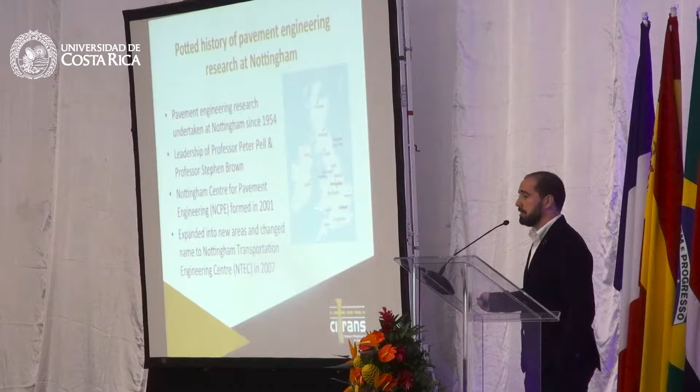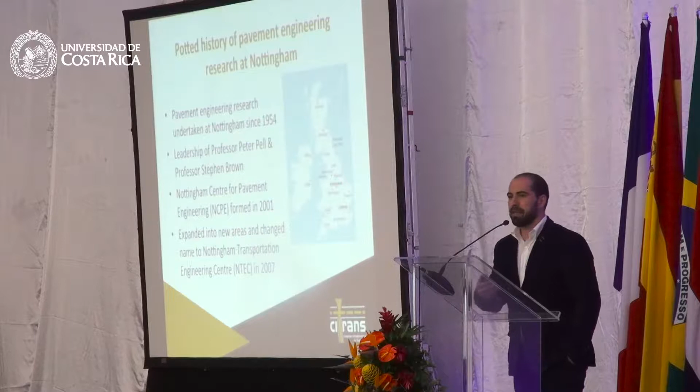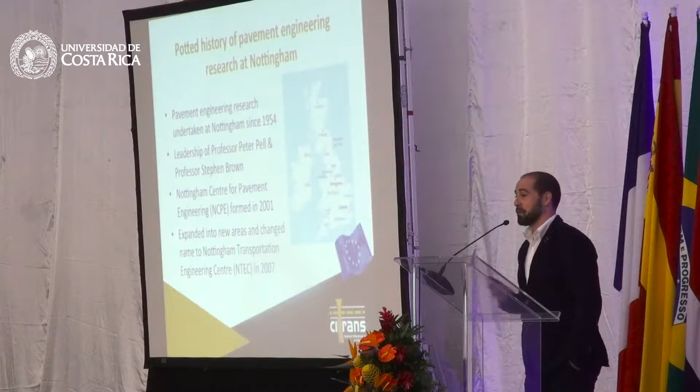Now, for those who don't know, Nottingham is in UK, right? It's in that little red spot in there that is 2 hours by train from London, and it's in an island that belongs to the European continent. Although recently we are having some issue of communication with Europe, and I would just say that the European continent is kind of there, right? But you are more than welcome to come anytime, in both Europe and UK.

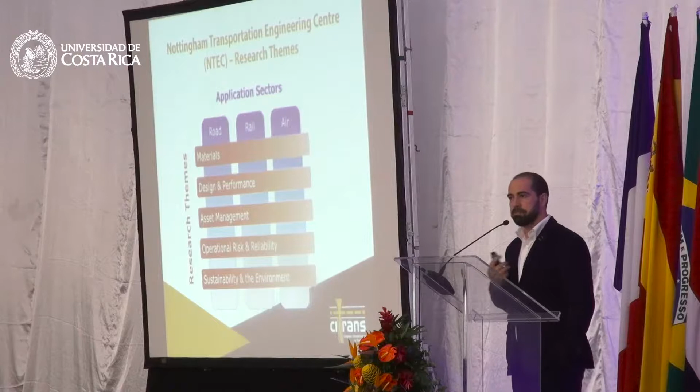To continue, the center, the building that you can see, was built by Shell basically. And it was built with the same vision and effort of the people that are now in Costa Rica. And the group now is a little bit smaller, because we kind of had a reassessment, but still a very good group, quite big and influential in the pavement engineering community. We work in several sectors, I have to say mainly in road and railways, by looking at different types of material, different types of design. And between these research themes, I would say sustainability is the one that really belongs to me. In order to tell you what my contribution is in this, I will not say a lot of words, but I will invite

We all want efficient roads and railways that don't ruin our environment. But what does this sustainability look like, and how do we assess it? The SUP&R ITN was set up in 2013 with European Commission support to create a new generation of professionals to help answer these questions now and in the future. We formed a multidisciplinary and international consortium led by the University of Nottingham to give this team training through research in centers across Europe. 4 years down the line, and our team has tackled a range of problems.

In pavement, they've investigated energy reduction through low-temperature asphalts by defining a design procedure for airport pavements, developing an environmentally friendly bitumen emulsion, and seeing if combining it with a high rate of recycling would affect durability. Meanwhile, 2 other studies investigated the successful reusing of end-of-life tires and biomass within pavement. In railways, they investigated combining low-temperature asphalt with recycled materials to create sustainable trackbed sublayers, reducing maintenance needs through ballast stabilization with bitumen, and improving track monitoring by using vehicle responses to detect track damage or through geophysical methods.

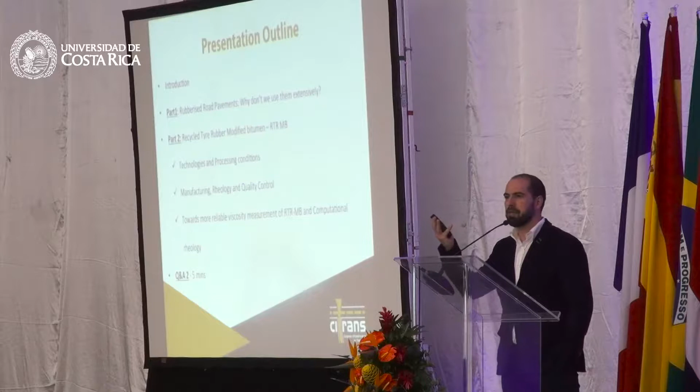Right, having said that, my presentation is going to be mainly made of 2 points. The first one, I would like to be a little bit provocative and ask why we don't extensively use rubberized asphalt. Bill before told you the benefits of it. I would like to go a little bit more into the basics of this technology and possibly stimulate the thinking and some replies from you. And also I would like to provide you a little bit of the experience that I gained in these years with this type of material, and possibly some advice for researchers, people that are supposed to provide technical support to contractors, policymakers, and whoever has to implement this technology.

So, first of all, end-of-life tires are a waste of a resource. I can just say very quickly that this material is increasing with time. There is a massive use of tires and a massive amount of waste tires. In Europe, we have been able now to recover more than 96% of this material, and we need to find solutions for further use. So what we do is basically take this material, an engineered material that engineers like us created, and we try to make it into crumbs or different forms, and we have to find solutions for reusing it.

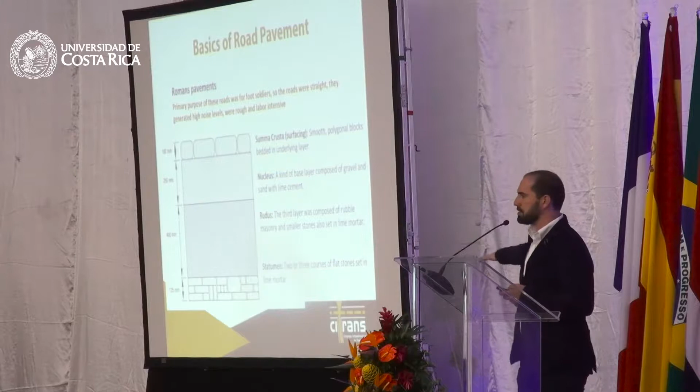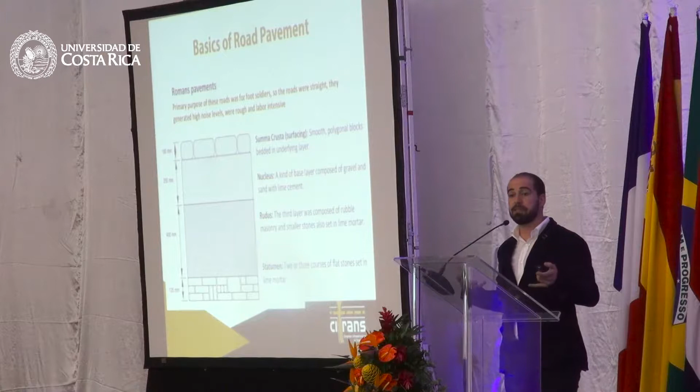Well, apparently, rubberized asphalt is one of the most successful in terms of reuse of material. But how come? Why is that? Well, to tell you, don't be scared, we are going to Roman times, but I'll be quick. This is just to say that the pavement is a structure that is quite simple. We have to bear some load. We would like the structure to be away from water. And so we create a flat surface with stones. We create some space to avoid the water coming up, and we still have the structure for some bearing capacity. And then we have a functional layer that at that time was for soldiers. It doesn't have to be too comfortable, but it has to be stiff to spread the load.

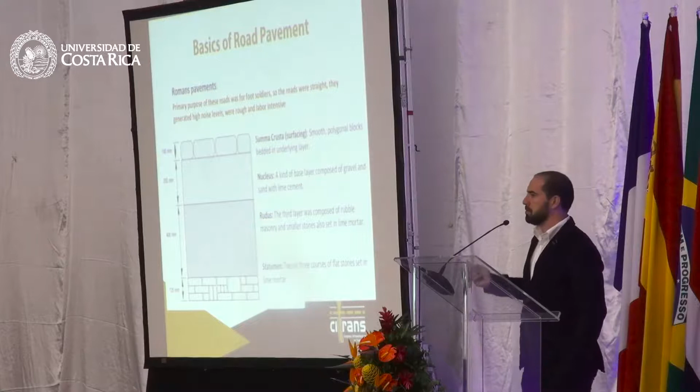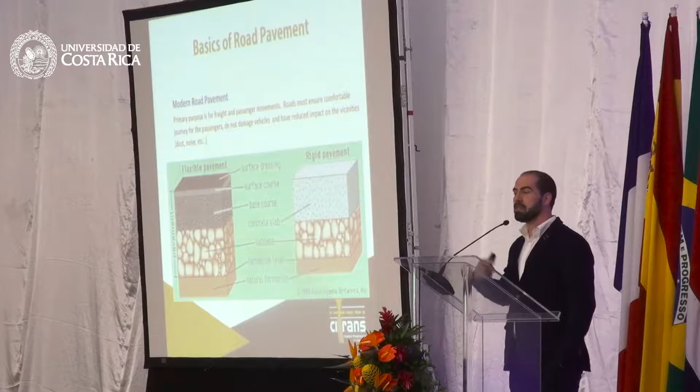Modern times, did we change a lot? Well, the structure is the same, but we have been changing the type of load on it, because now we want a comfortable ride, we don't want dust, so we started using rigid but also flexible pavements. So how do we get that? Well, for flexible pavement, we would like not to spread the load as much as we can, so having a structure that flexes. In order to do that, we play with the material by mixing aggregates, binder, other stuff, and achieving a good formula that allows us to have a material that withstands permanent deformation, fatigue, low temperature, you name it. Now, I can tell you that if you want something more flexible, maybe rubber can help. And this is pretty much it.

What we did is engineer this asphalt with a material that can help have better performance, a better flexible pavement. And how do we do that? Well, the rubber, when it's reduced in pieces, is called crumb rubber, and it can be used as a modifier of the bitumen or as a replacement of the aggregate. In this talk, I'm gonna focus on what we call the wet process. That is the modification of the binder.

That, by the way, is the most successful technology that you find. It is the technology that really can help the widespread use of the rubber when we talk about performance. So this technology is basically a binder that is non-homogeneous, and that's the main problem. Because being non-homogeneous, it's, we say, not storage stable.

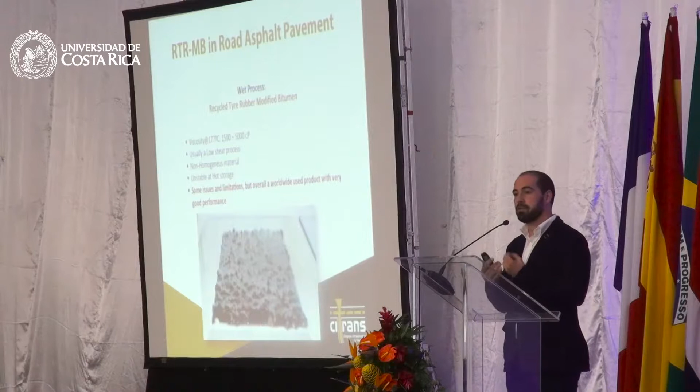When you are in a plant and you want to keep your binder in a tank, it happens that the plant keeps the tank on for the weekend. So you want this binder to be homogeneous for at least 3 days at a high temperature. That's the test that we do to actually assess the storage stability. Well, this material is not storage stable, and that's a very important point that is actually creating problems for the widespread use of this material. But apart from that, it actually allows us to have a very, very good product, very good technology for road pavement.

First of all, this is not related to the asphalt or the flexible pavement, but I really want to name it because I really think that everyone should use it. So the SAMI. SAMI is basically a tack coat that you can put when you do an overlay: you spray the bitumen, you put the rubber, actually a lot of rubber. We have 1,500 tires per kilometer. And then you put the pavement on top. This creates, with the chippings as well, a reflecting membrane that basically prevents cracks from coming up or going down, but mainly coming up. This uses a lot of tires and can be immediately used.

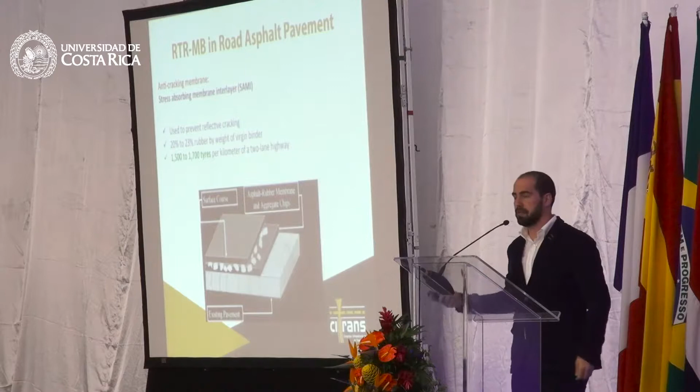The others that are more related to the asphalt are the more famous one, that is the open graded, so it's a kind of porous asphalt that allows you to use a lot of binder, almost 9%. But it can also be used in dense graded and gap graded with a different type of formula.

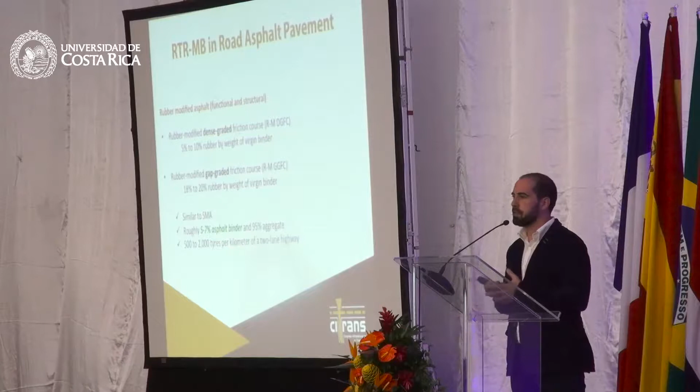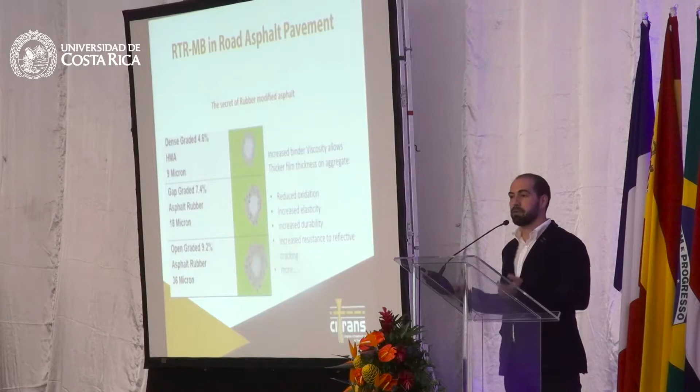But what's the secret? Why can we do this? Why do we have better performance? Well, the main secret is that because the rubber allows the binder to have a higher viscosity, it actually allows a thicker film around the aggregate. And this also allows a higher amount of binder. So you have an asphalt that may cost more, but actually it has great performance. We come back to the flexibility we were talking about before. Now, this is the main secret.

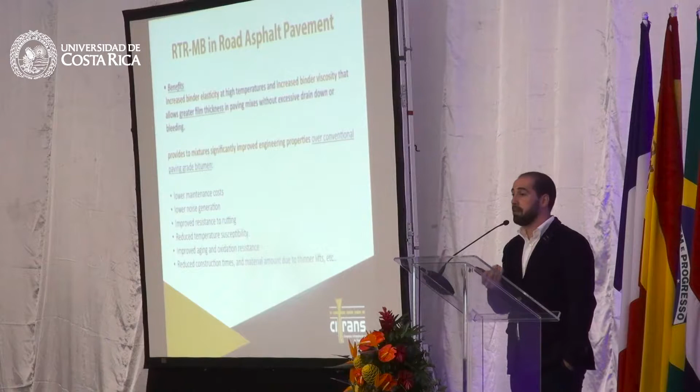There are others. I can just list them. The benefits are all listed in there, and the literature is full, but mainly this is the secret: having the thicker binder and also reducing what we're discussing today, the oxidation of the binder itself.

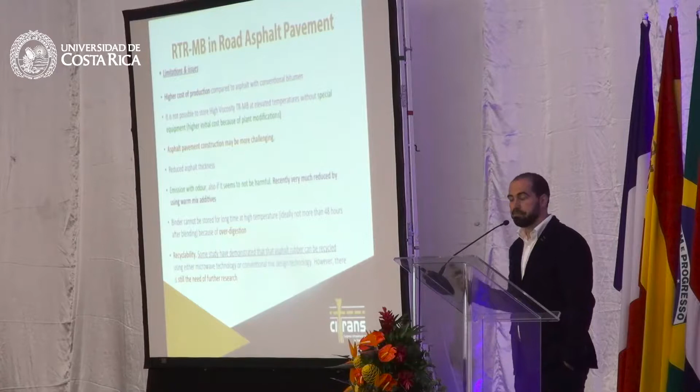The limitations, these are the main things that possibly as pavement engineers we can improve. Well, there is a higher cost, mainly because you have more binder in it. The storage stability is a main issue, and that's why you have to modify the plant to have tanks that are agitated. Then also the construction is more challenging, and you need training for these people. Recyclability is still not fully proven, but there are a lot of studies that start to say that we can recycle this material too. So if we manage to overcome these issues, we have a product with very good performance.

And now I'm trying to show you a few technical bits that you can take and possibly spread or use in your work. But before, I wanted to say that this technology really can be compared to asphalt with polymer modified bitumen, if it's not better in certain ways, like with porous asphalt. And again, I want to pose you the question, why don't we use it? And possibly we can have some replies later on.

Well, what we can do is support contractors or people that want to use it with better quality control and a better design of this material. I personally did it for pavement, but also for railways, and recently also for roofing membranes. And this technology is actually starting to be used because of sustainability, which is starting to be a very good reason, but also because tire rubber can be a replacement for synthetic polymer if there is some good engineering behind it.

Right, let's go more to the technical part. First of all, we have one product, the one that is not storage stable, the one I just showed you, that is called the high viscosity tire rubber modified bitumen.

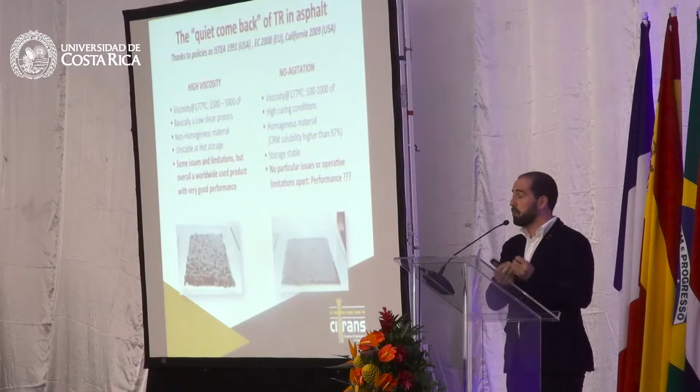But some researchers, like me, are trying to overcome the problem of storage stability by creating a binder that we call no agitation tire rubber modified bitumen, that basically is storage stable, and the interaction between the bitumen and the tire rubber is different. Now, this binder still doesn't have the performance of a polymer modified bitumen, but that's where the research challenge is.

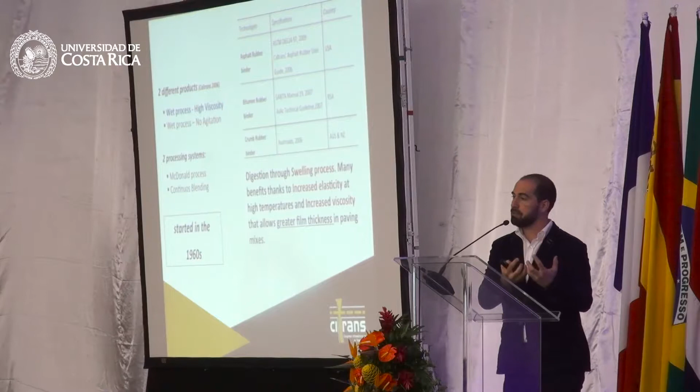In order to produce this, well, the high viscosity is the one that is most famous, and actually there are specifications on it. And the phenomenon is basically a swelling of the tire rubber within the bitumen. So the oily fraction is swollen within the tire rubber. And this increases the viscosity and allows a greater film thickness.

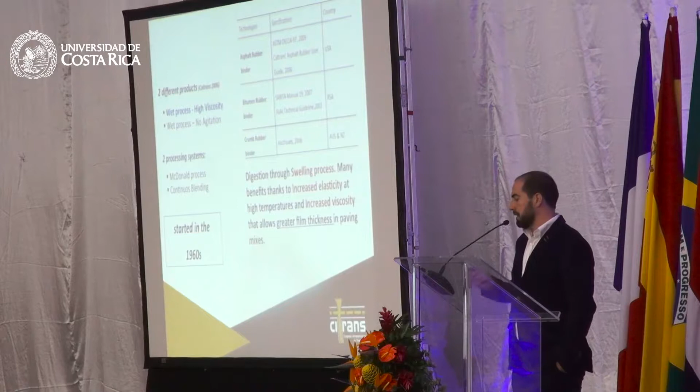This can be produced in two ways. The first one is the historical one, where you have initial mixing, also in low shear, but then there is a digestion process that allows this swelling to take place. And this is called the McDonald process, from the name of the inventor, actually from Arizona.

The other one, that maybe can be used also in different countries, I think, is the continuous blending. So you can use a high shear blender, the same that you can use for PMB, and you can then use storage tanks, but agitated because of the storage stability. Or if you do it in the field, or you do it in batches that don't need to be stored, you can use it directly with the mixes.

The other one is the no agitation. As I was saying, it is a completely different process. You tend to melt the tires within the bitumen, so you have a matrix that is actually kind of fluid. You don't have this inhomogeneity. But with this, of course, you start losing the properties of the rubber. So you need to find a balance between the storage stability and the performance of the binder.

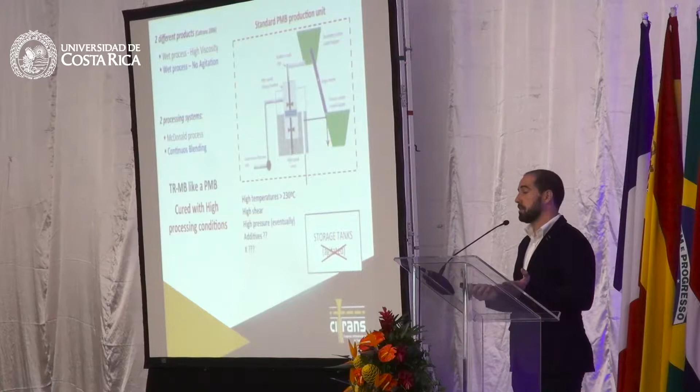This type of technology can be produced with what we call high processing conditions, so high shear, high temperature, and it doesn't need, as I say, agitated tanks. I don't want to go through this, there is literature on this, but each of these variables has its own importance in the process. Keep in mind that the temperature is the main parameter. After 160 degrees, the rubber starts to, let's say, break, depolymerize, devulcanize, and can interact better with the binder.

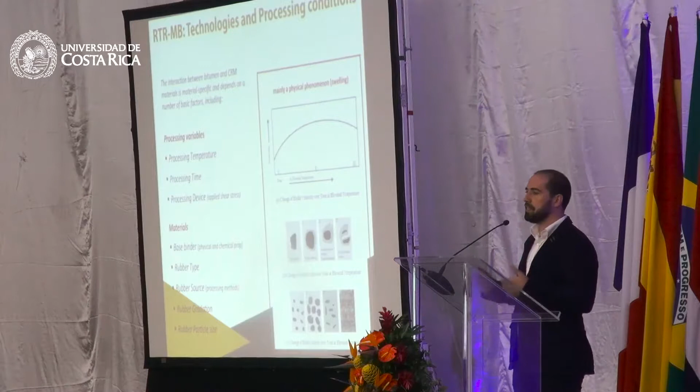Then the time is also a main parameter. But as engineers, we can cook it properly, right, and optimize this process. And actually, also these specifications I was telling you about before tell you which type of processing conditions to use to obtain the type of product they want.

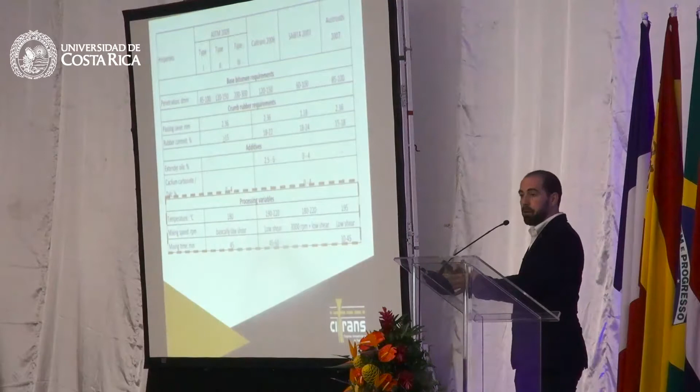The main information that I want to give you, though, is that in order to support a contractor or whoever wants to produce this, we need to have a very strict quality control of this material. We need to design it properly, we need to go in the field, get some binder, and again do testing. And only with this loop can we ensure that we have a superior binder design.

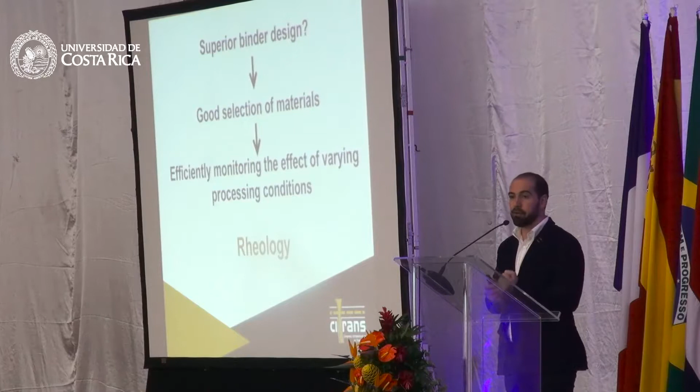But in order to do that, we need a good selection of material, but actually also some methodology that allows us to monitor this process. And I did find in my research that rheology is something that is very powerful and can help designers and pavement engineers in this task.

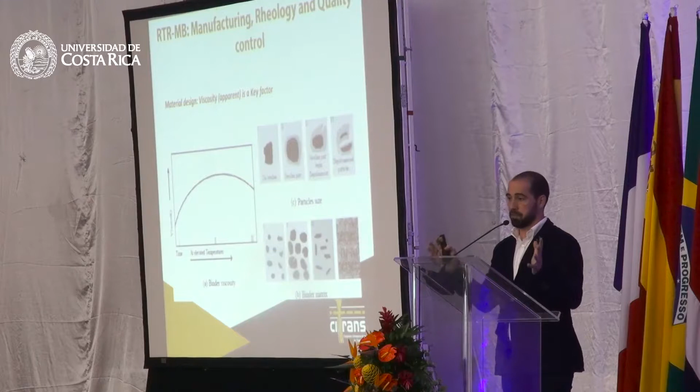Now, what I want to show you is that there are some issues when you do rheological tests with this material, and we still need to improve the way we do tests to get the results that we need to support people. First of all, I want to point out that this process is very much linked to measuring viscosity, right? Because the peak of this curve is the one that we want to achieve to have the best binder possible. So how do we do that?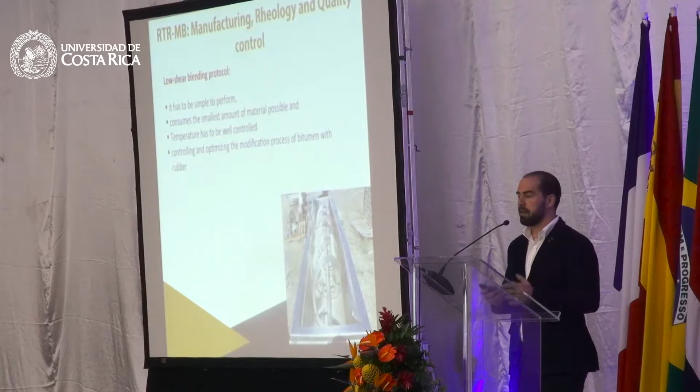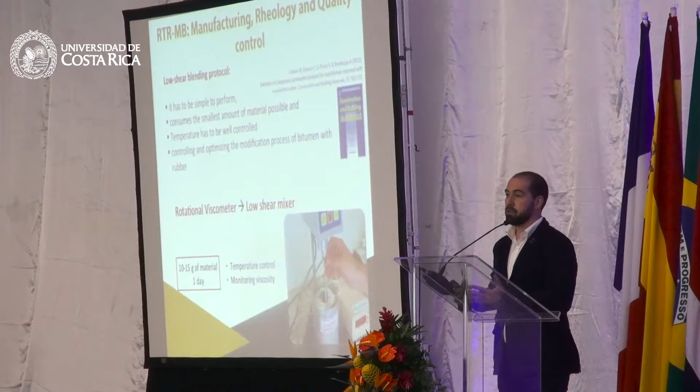You can do it quickly, and that's why we developed a procedure that basically adapts the Brookfield viscometer to be used as a mixer. So you can control the temperature, you can measure the viscosity in real time, and you can have this type of curve that tells you when you reach the viscosity, when you reach it with different contents of tire rubber.

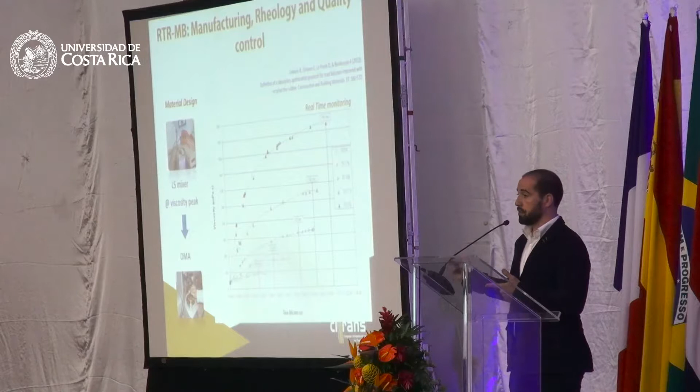If you couple this with the use of a rheometer, first of all, I want to underline that when you use a rheometer with this material, we have to be careful. My suggestion is to monitor high temperature rheology, because if you monitor that and optimize that one, it will be fine at low temperature. I'm not proving this to you here with evidence, look at the literature, but that's the best

way we found. One thing that I want to point out: if you use an inhomogeneous material with particles that can be more than 2 millimeters sometimes if you use the McDonald process, you really need to be sure that the gap of your plate geometry is able to give you the data that you need. In this study, we basically do the gap setting study, and when we monitor an SBS, that is kind of a homogeneous material, even if you change the gap, you still have phase angle, at different temperatures, that doesn't change with the different gaps.

But when you go to a tire rubber modified bitumen, especially at high temperature, when the binder is melted and the polymer is still there, you can have misleading results. In particular, with 1 millimeter, we were basically testing the rubber. So the suggestion is always to do this type of gap setting study. And if the plate doesn't work, you can go to what we call cup and bob, so coaxial geometry. I'm sure you have it in your amazing lab, so just be careful.

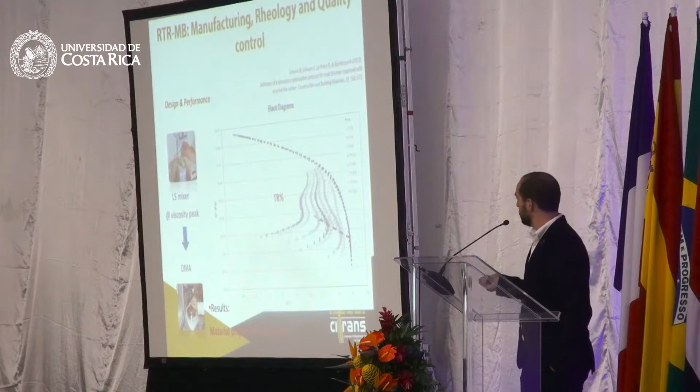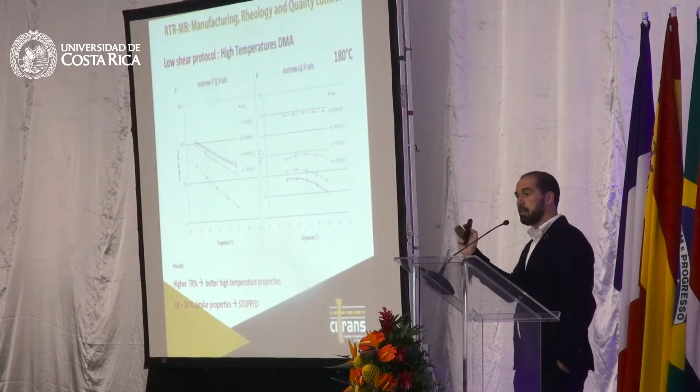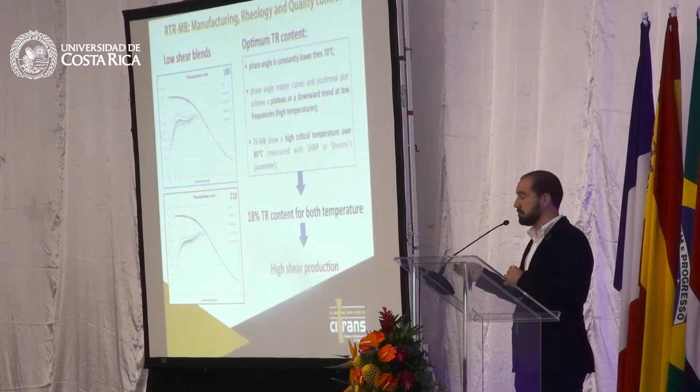What you can do is use the low shear blending protocol with different tire rubber contents, and then you can stop when you start having similar properties. So you can use this data. I also use isochronal plots at high temperature, and by using a really small amount of material and looking at master curves of phase angle, complex modulus, and isochronal plots, you can determine the best tire rubber content for that bitumen.

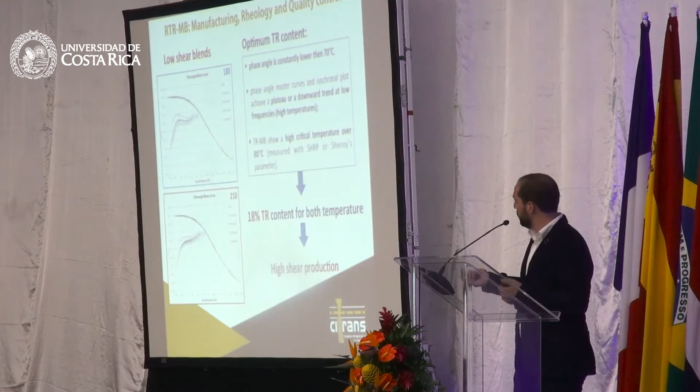Once you have your recipe, you can go directly to high shear if you need to produce a bigger amount. Right? You can use low shear or high shear. Why high shear? High shear just decreases the time. Now we go to that.

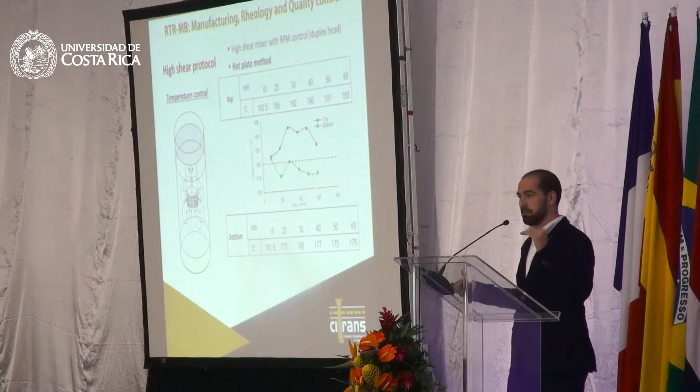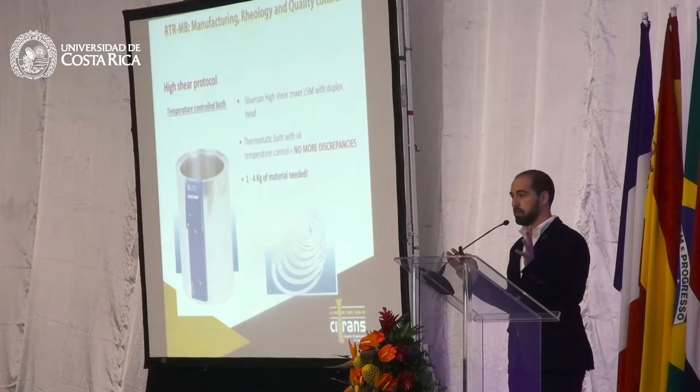First of all, I saw today that you're not using this, but some people use the hot plate method to warm up the binder. If you use this method, you will have a lot of discrepancy in temperature between top and bottom. So my suggestion is really to use a container where the temperature is controlled all over the container, because there is oil between two walls. This ensures the best control of the temperature.

And again, if you use high shear or low shear, the product is very similar. Here is an example of the rheology. But what is changing is the time. With high shear, because you increase the dispersion of the particles, you have a higher reaction, so you can get it in a shorter time frame.

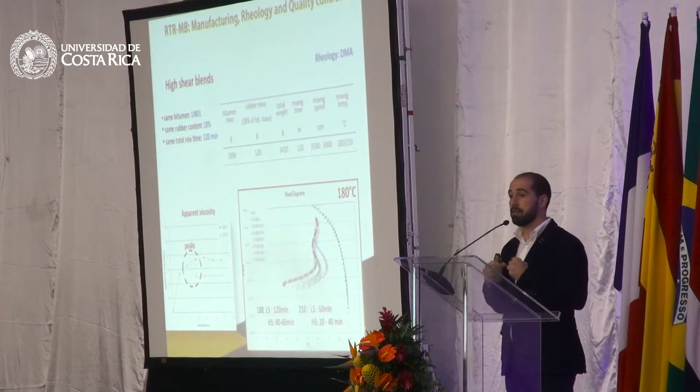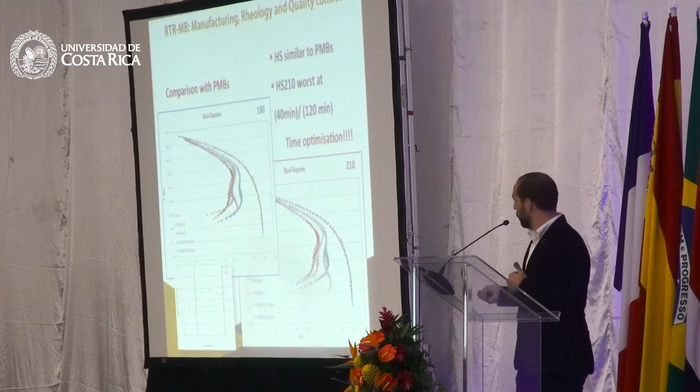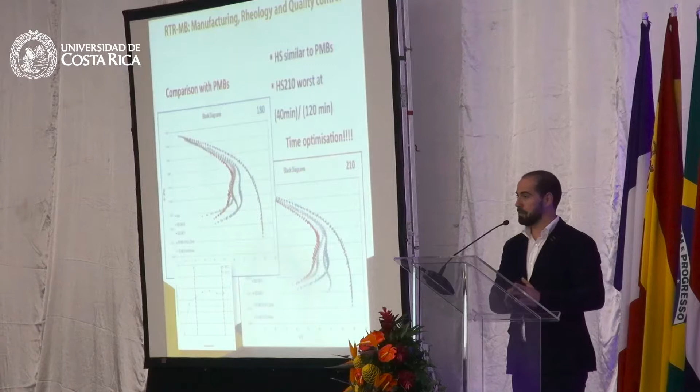But you have to be careful with the time, because in these slides, for instance, the red one is a polymer modified bitumen that has 8% polymer, and the blue one has 4%. So different properties, right? If you use high processing conditions, 210 degrees in this case, and you go with a time beyond what you find in your low shear blending protocol, you may obtain a different type of performance. So you can pass from a highly modified binder to a low modified binder. So time, temperature, and shear are very important in your binder design.

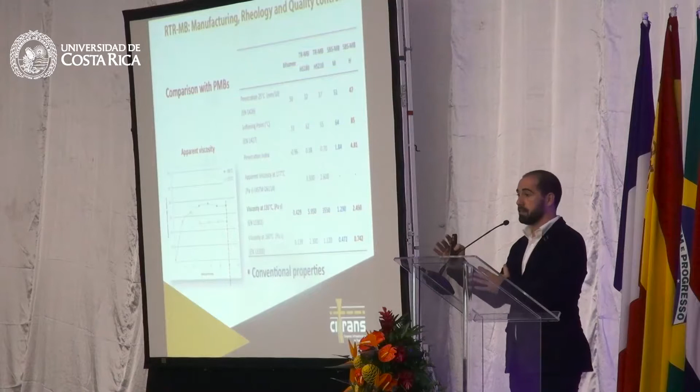I put this slide to say that we can obtain different products. So we can kind of swap from high viscosity to no agitation by controlling this processing condition. And my suggestion is always to compare to a target that, for the reason you understand, for me, is a polymer modified bitumen. So you want to obtain a superior product with rubber. So look at the polymer modified bitumen rather than the neat bitumen.

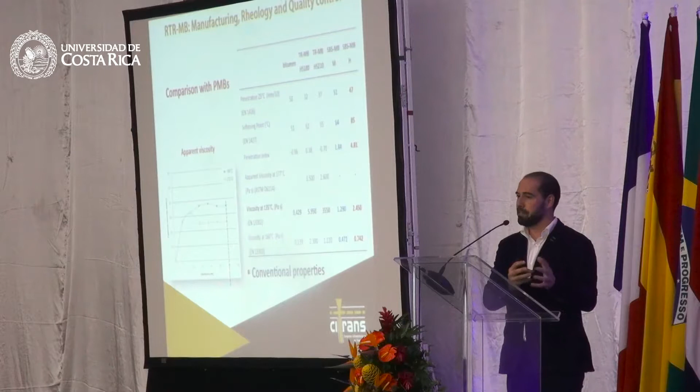As a conclusion of this part, I would say that, again, be careful in the procedure you use in the lab for your binder design. And we can obtain a product that has very similar properties to polymer modified bitumen. And this protocol that I show you really increases and optimizes time in the lab. So I would suggest you to look around, look in literature. I can support you too, but I found a lot of benefits.

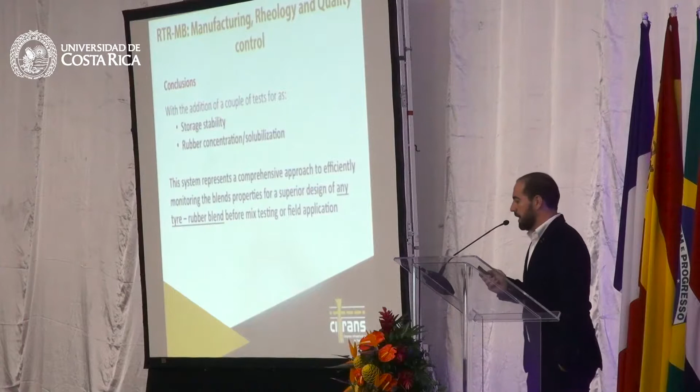Now, as a conclusion, if you use this type of protocol and also possibly try to understand the concentration of rubber and storage stability, you can really go towards no agitation tyre rubber modified bitumen. That for me is the real key to widespread the use of this material in pavement engineering.

Now, as a last part, as I was saying, this product is a little bit not stable, right? But not just in the storage, that is a prolonged storage over time at high temperature. But actually, it's not stable also when we do viscosity measurement. So, in order to show you this, I would like to go, again, simply in the basics. What is viscosity? Viscosity, we can define it as a resistance to flow of the fluid, right? And we measure viscosity of several products, and the bitumen in particular is a very fascinating material because you change the temperature and also change completely the viscosity.

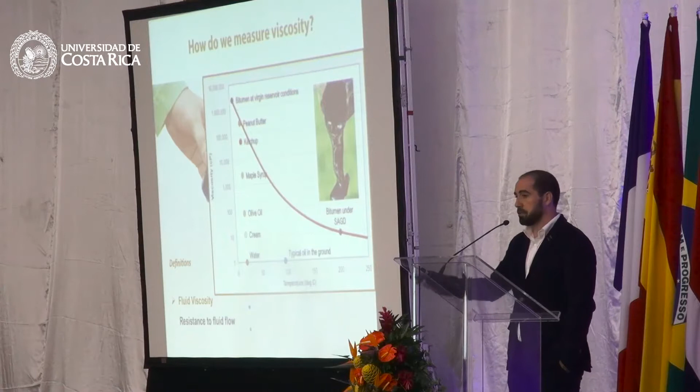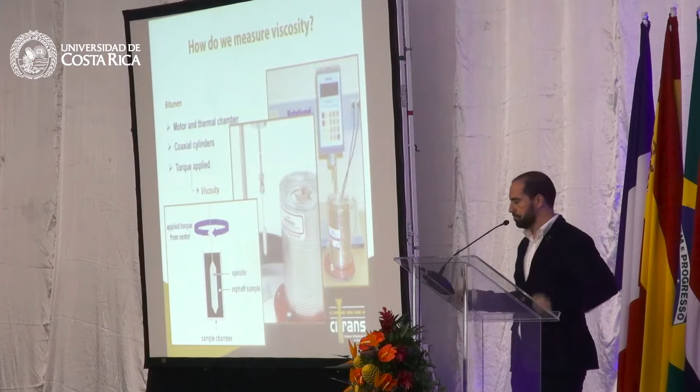So we use usually a rotational viscometer that has a thermal chamber so we can control the temperature. We use coaxial cylinders that allow you to have a cylinder within another cylinder, and you have a film of binder where you measure the torque that is applied by the machine, and through an algorithm you find the viscosity. I keep it simple as this. What I can tell you is that usually this viscosity is calculated with a formula that is dependent on the geometry you use.

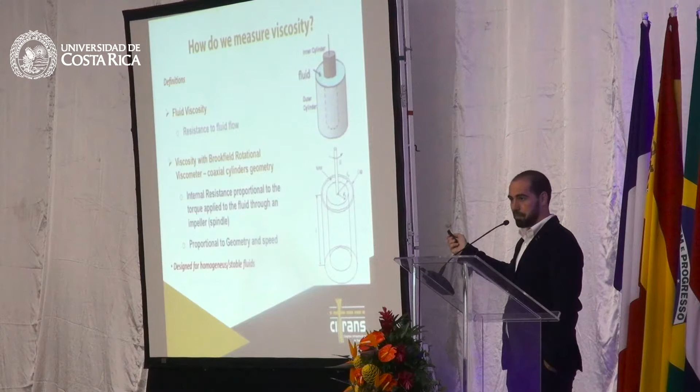So when we use a material that is not homogeneous but is quite complex, like tyre rubber modified bitumen or mastics or emulsions, we can name it, keep in mind that this equipment has been designed for homogeneous material. So what happens when we have complex fluids? Well, I made some research on it, and I just would like to talk you through it.

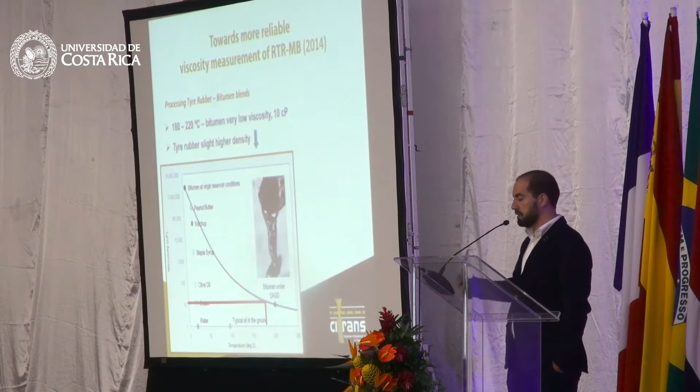When we modify the bitumen with the rubber, we arrive to 180 degrees, and the bitumen has this type of viscosity. Now, we took a standard fluid that is transparent, so we can see what's happening, and has a similar viscosity to the bitumen at 180 degrees. We got some rubber, and we made a glass container. This glass container has a spindle, that is that cylinder that we saw before, right? It's called spindle, this geometry. And this one is a fluid with, I think it's 3%, don't remember, but there is some rubber in it, and we just keep it agitated.

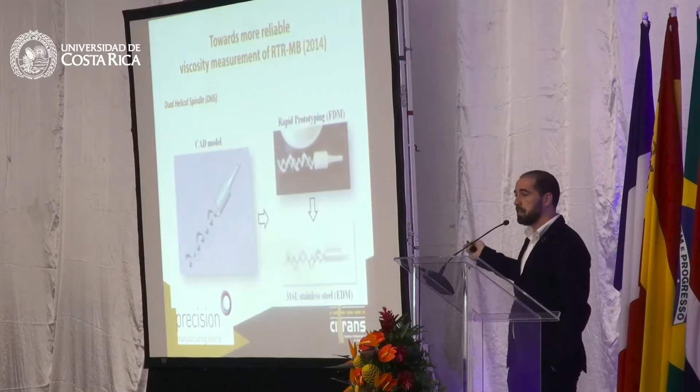Can you see the difference? It's white, so you can see through a little bit. So basically, even after 20 minutes, the particles were still in there. So from this, I continue and say, okay, but then possibly what we can do is changing the way we start measuring the thing. But I just wanted to understand more what was the effect. I mean, why this is happening, and how this can be useful.

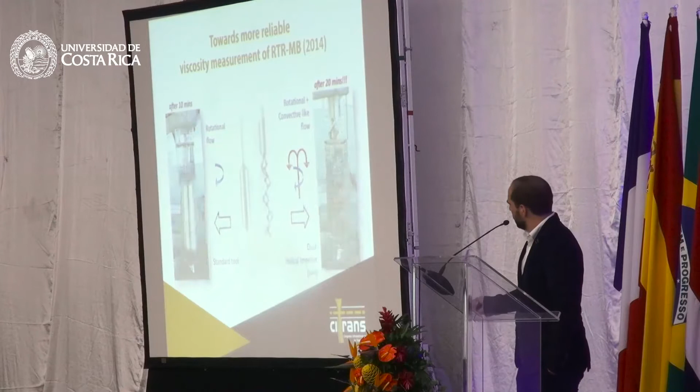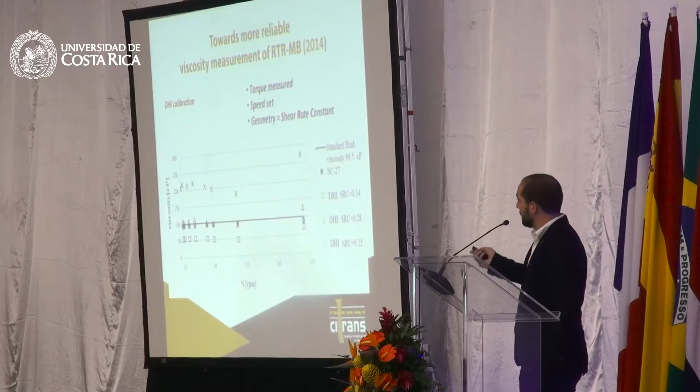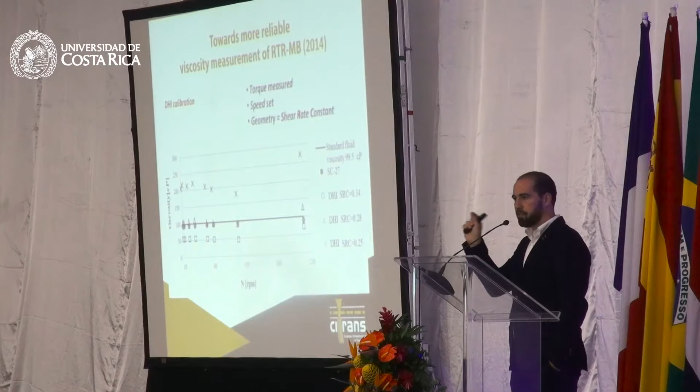So first of all, we started trying to understand whether the measurement that we had from this impeller were reliable. And we made some calibration. Quickly, the calibration, this is a very, I would say, simple calibration, but we now have going a more advanced level. But basically, we try to find what is the shear rate constant that you have to put in the viscometer. So which type of number of geometry you can use within the database of the viscometer to have good result. So we calibrated with standard fluid, so we know the viscosity.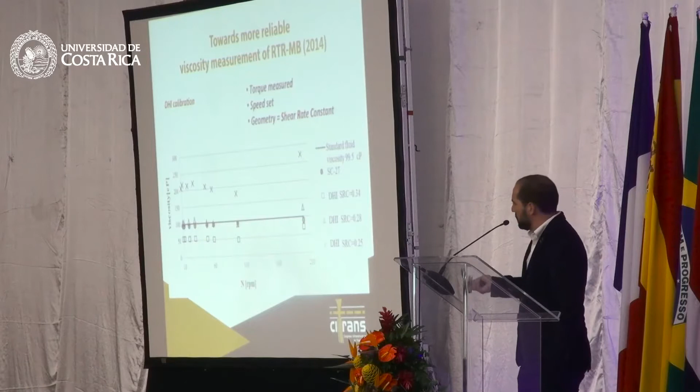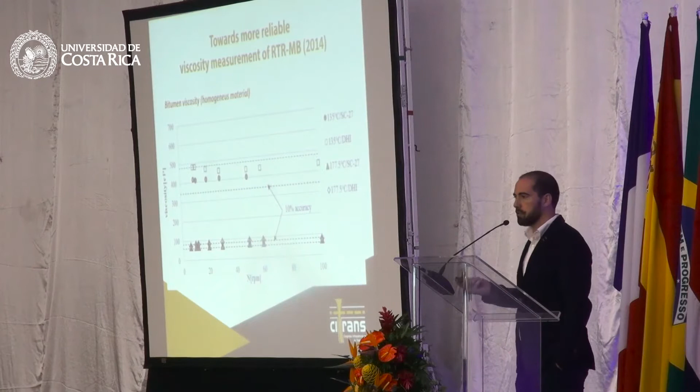So we say, okay, let's see what happened. And we did some measurement with a bitumen. And we did a different temperature and a different RPM, different speed. And what we noticed that with the bitumen that is homogeneous, we have very similar result. So this calibration for us was accurate enough. 10% for us was accurate enough. And very similar result in terms of values. But then we say, okay, what happens with the tire rubber modified bitumen? And we had this result.

So very quickly, here we have total quite different result in terms of value. But also I would like to point out that when we change the speed with what we call dual helical impeller, we have the same results. When we change the speed with the spindle, so the standard geometry, actually the results were different. So what's happening in here? Why this is kind of consistent and this is not? Now from this we really couldn't give an answer, right? We have some ideas but we couldn't give an answer.

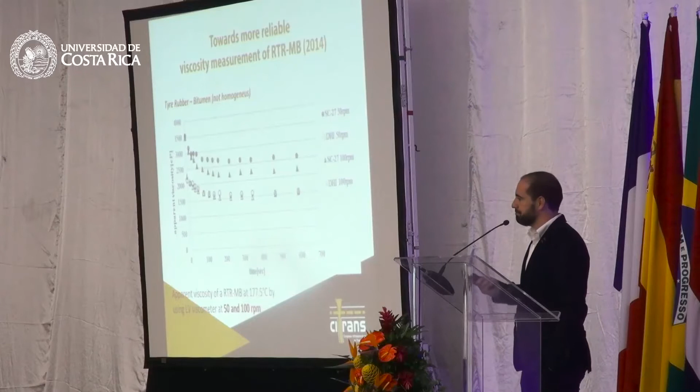So we start seeking help, and we thought that maybe going into the material and try to simulate what happens can give a reply. And that's why we started using computational fluid dynamics. So we started working with people that use this methodology, and we set up a model. It's called multi-phase model. I'm not the expert on this, so I'm not going in details. I just want to say that if we set up the model properly and we put the right input to the material, what we can see is a distribution of the particles, for instance, inside a sample. It's called volume fractions, and the velocity fields. So this maybe can help us understand whether there is sample stability and actually what was happening.

What we saw was kind of fascinating. So this one was made with a fluid that is 500 centipoise, so with this kind of high viscosity. And when we have 10 RPM with a spindle, we kind of have similar measurements, similar situation. While here, at the beginning, we have a settlement, but then this mixes much better than this. Now, the red part means higher concentration. The blue part is a low concentration. So basically, the rubber is here, right?

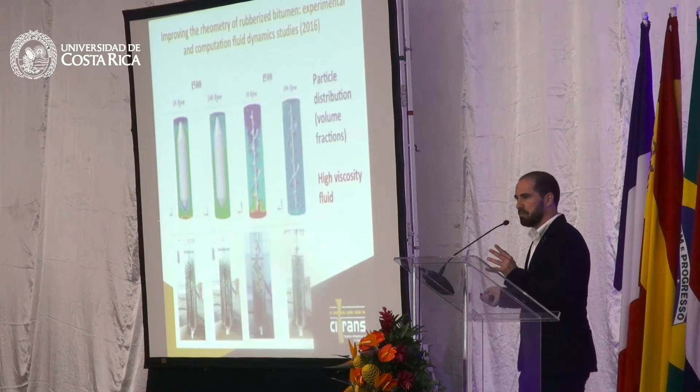When we go to a low viscosity fluid, that if you think about it, it's basically a fluid that provides less resistance to rubber to settle, you can see that with the spindle, we start having higher concentration here when we actually measure it. While when we use the DHI, also with this fluid, we have a better distribution of the particles within the sample. So this started telling us that possibly we are actually distributing better the particles within the sample.

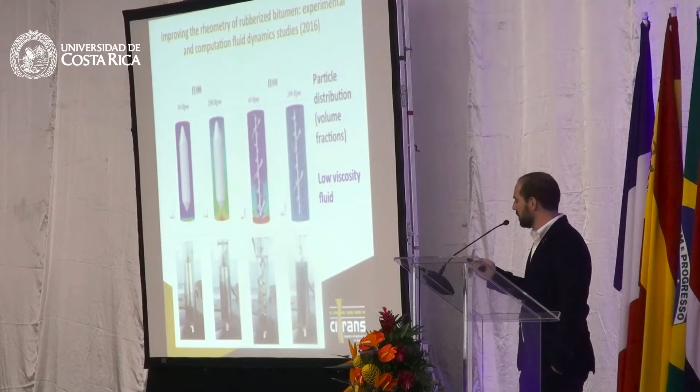But what was actually the phenomenon? What was happening? So we start looking at the particles' velocity, and we find out that within this axis, this impeller allows you to have a pumping effect of the particles, while the external helix started to push down the particles and creating some kind of complex scenario in here. So this tells us that this design is improvable, but still is not the scenario in here where we have higher concentration next to the walls and the sample is simply not homogeneous.

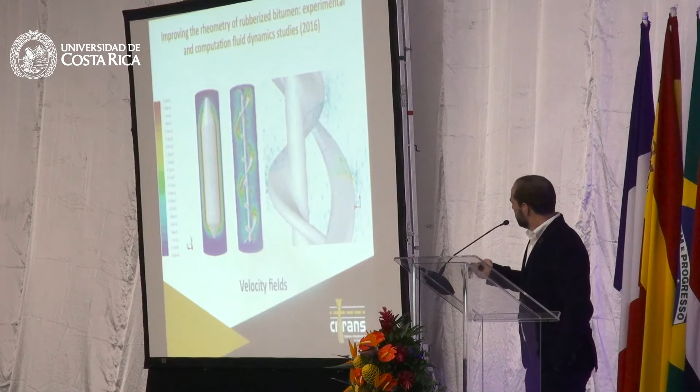So I show you this just to say that we can use also this type of methodology to understand better what's happening during binder design. And we understood that we have a convective-like flow thanks to this new design that improves the rotational flows of the spindle. But also we can have enhancement of the design. And actually, this is just to tell the work in progress. Thanks to the CFD, we start understanding again the velocity field, but we start to improve the design and we optimize the design.

I'm not showing you now, but I just want to share some results: we are now able with this CFD not only to look at the velocity field and the particle dispersion, but also at the torque and viscosity. So basically using the CFD, we're starting to measure the binder directly in the computer. So we started saying, okay, maybe we can use this CFD not only for understanding the design and improving the design, but maybe we can do a binder design directly in the computer before going in the lab.

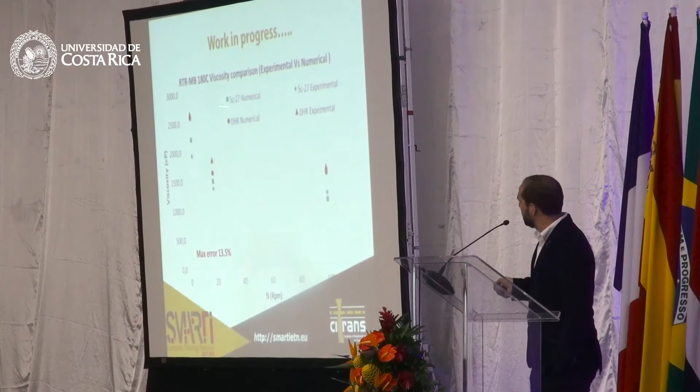And that's exactly what we're doing. This project will be undertaken more deeply within SMARTI, this network that I was telling you about before. But I just want to share very quickly that we already obtained some results, and this has surprised me a lot actually. Basically this is what we have experimentally, and this is what we measure in the computer. So we are now starting to be able to measure the viscosity of a blend that we want to design already in the computer before going in the lab.

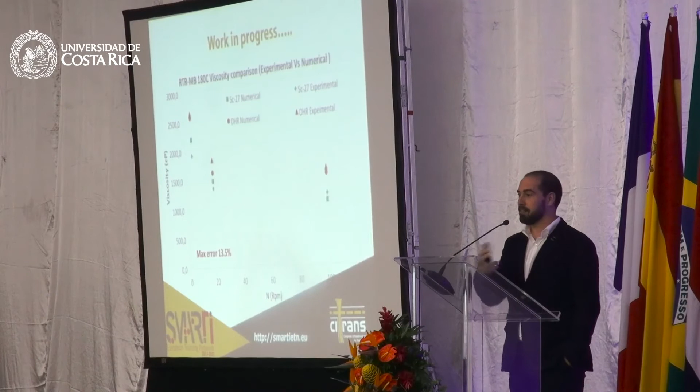And this, for instance, can allow us to design the best binder possible, and then find the material that can allow us to design the binder that we want. So that's pretty much it. I just wanted to say that for this part, possibly we can have a more accurate binder design. And what are we measuring right now? Just food for thought. Just remember that viscosity is a key factor, and we have to be careful what we're doing in the lab.

To finish, as I was saying, I give you a provocative question, but I also like to give you some recommendations and possibly some replies from me. I think that high viscosity product can already be used if you use a continuous blending system, and it's a product that works, so it really needs to be pushed. In order also to reply to the question that Bill kindly gave me: yes, you need higher temperature. Actually 180 was the temperature that we used before for manufacturing.

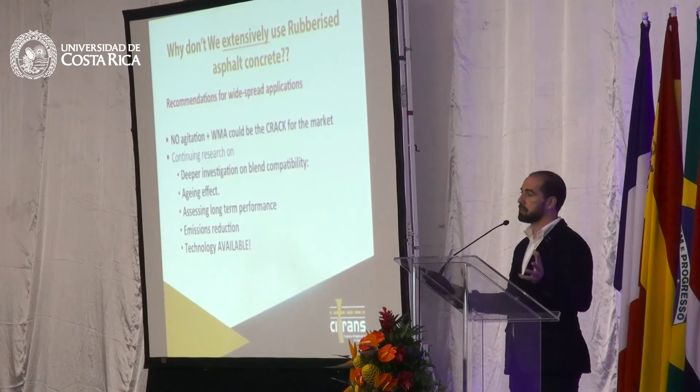But if you use it in combination with a warm mix additive, you can start decreasing this temperature. And actually that's what they're doing now a lot in California, and now starting to do in Europe as well. So this can actually help also from the carbon footprint point of view. In my opinion, if we go for no agitation and possibly couple warm mix additive with high viscosity, that can be the crack for any market to introduce dry rubber. Just to give you some replies, before I possibly have your replies.

How can we use this technology extensively? Well, first of all, I think that we need the help of policymakers, because we are recycling or reusing an alternative material from another industry, and whoever is doing this has to be trained, has to change his culture, and possibly incur some costs. And I do think that he needs some support from government, because he's doing something that exposes that principle of circular economy. So policies and specifications should be in place to help.

The other thing: if we use a waste material in our field, pavement engineering, I do think that we are solving the problem of another industry, that is the tire industry. So why don't they help in making this happen? It can be pavements, it can be other applications, but the tire industry should help to reuse recycled tires.

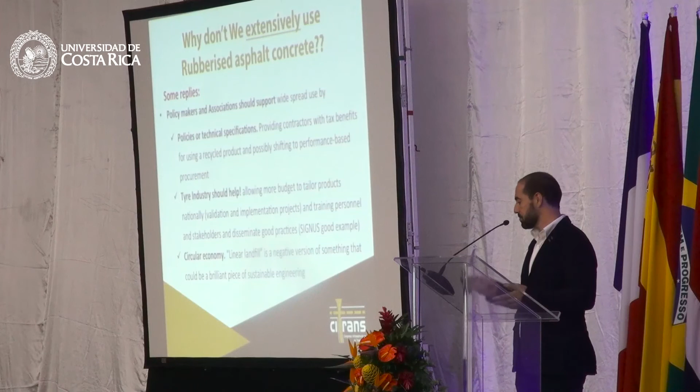And lastly, circular economy is a concept that is now taking place in several places, and there is one word that possibly you're going to encounter in your career, that is linear landfill. Road authorities hate it, because we don't want to put a lot of waste in our structure. Our structure has to be performant. We don't want a landfill. Well, from my point of view, we should change this perspective and say that linear landfill, if it's done properly, is actually an amazing piece of engineering. But that's our duty. We need to help them change their perspective and make products that stand the comparison with the products that we have now in the market.

So this is my point of view, and I hope I have some replies from you too.